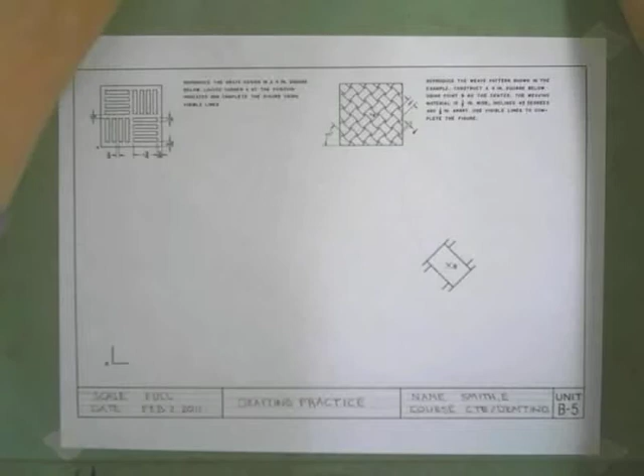Okay, going to start off with drafting plate B5. Going to do the first activity, which is B5a. That will be this first activity. Before you start it, please make sure that you have your title block all filled out. Just like the other drafting plates that we did, this drafting plate will just be called Drafting Practice. On your name, please make sure that you put your last name, comma, first initial.

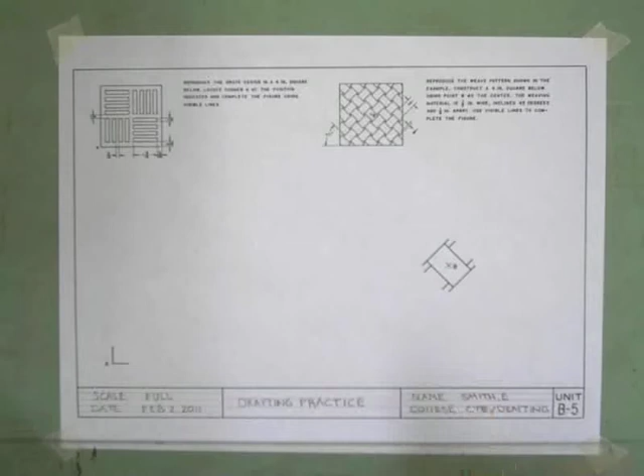Okay, the first thing that I'm going to do, this activity tells me at the top to reproduce this grate pattern in a 4-inch square. So the first thing that I need to do, with nice dark visible lines, using my T-square and my 60-30 triangle, I'm going to create one horizontal and one vertical line. Make sure everything stays square. I'm going to create those two lines. That's how I'm going to start it.

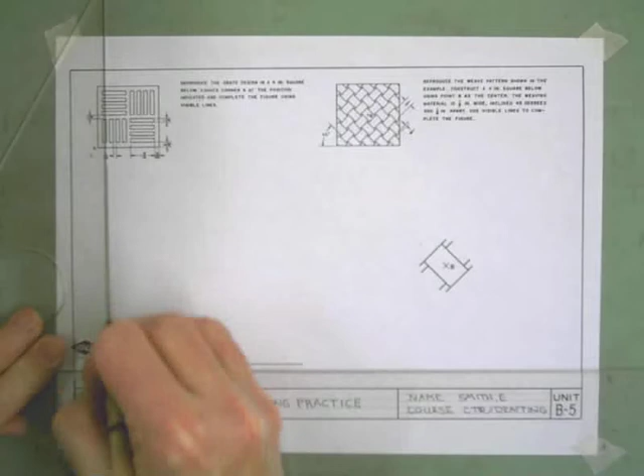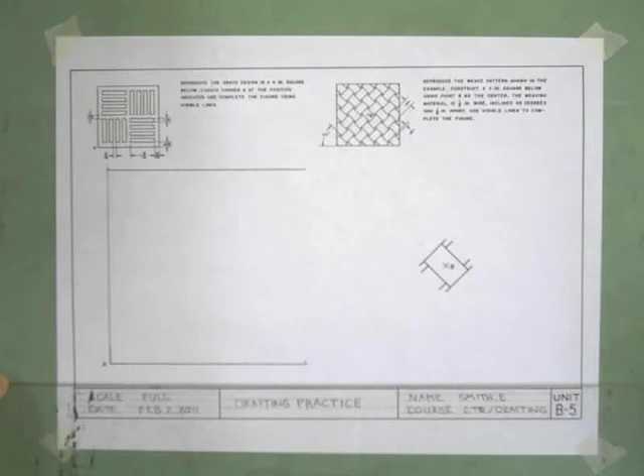Then I'm going to use my architectural scale. I hope I got this line long enough. Yep, I'm going to make a mark at 4 inches on the horizontal, and I'm going to make a mark 4 inches on the vertical. I'm going to go ahead and create that square, and it looks like I got this line just a little tiny bit short, so I can add to that. And I'm going to come in and do my vertical on the right hand side.

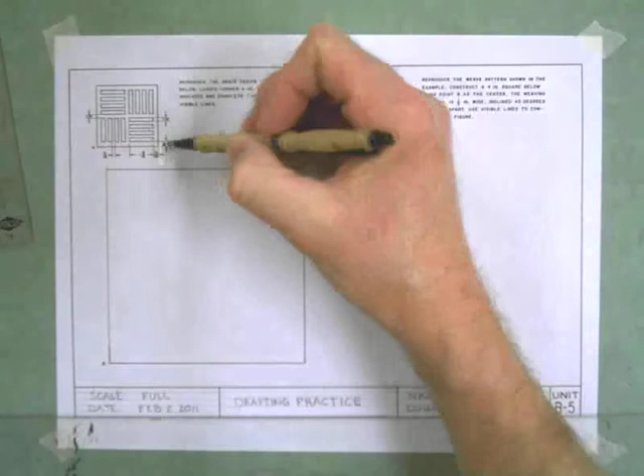I will use my eraser, and you could use your eraser shield here. Clean up those corners nicely. Brush. Clean things up there. Okay, step number 2 is I'm going to look at the measurements around. I see from right here that I need a 5/16 border around this.

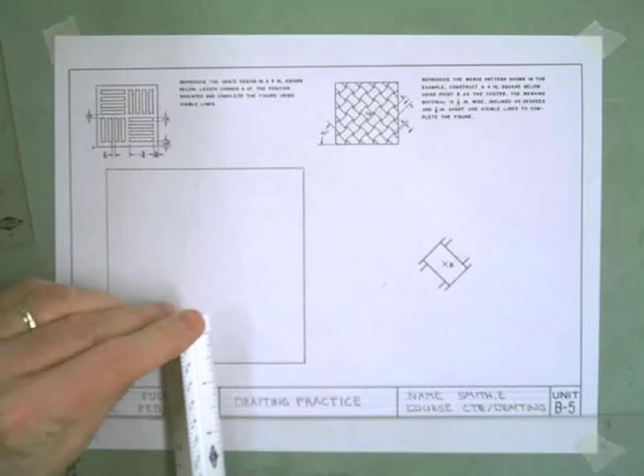So step number 2 is I'm going to use the basic side of my architectural scale, and I'm going to count in 1, 2, 3, 4, 5/16, carefully measuring all the way around on all 4 edges, 5/16. The bottom, so top, bottom, right, left, I'm going to make a little tiny mark at 5/16. Then I'm going to draw myself some nice light guidelines on my 5/16 marks. I'm going to do 2 verticals on my 5/16.

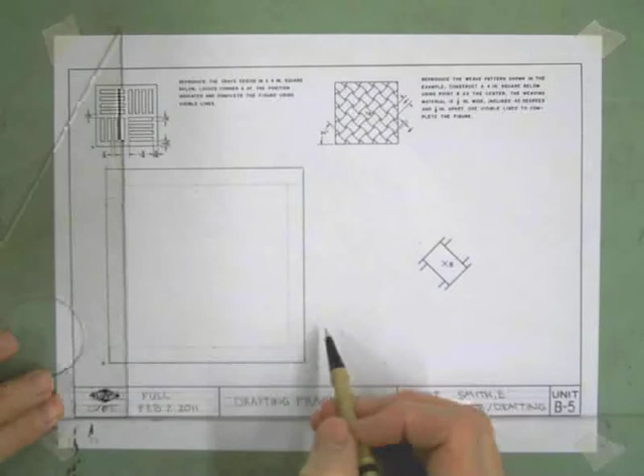And then all I need to do is I just need to come back in with my eraser shield and clean up those edges here, here. Be careful and don't erase too much of your border. If you're drawing light guidelines, it shouldn't take too much to get rid of those edges.

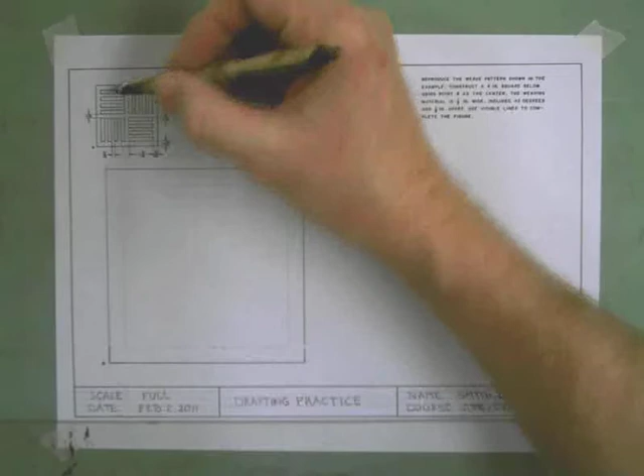Okay, step number 2, what I'm going to do, I know that I have to have a 1/4 inch area centered up vertically and horizontally. That's an easy one to take care of. I'm going to find the center of my square, which is 4 inches, and I'm going to divide that 1/4 of an inch in half, so that means I'm going to go 1/8 of an inch on either side. So I'm going to find the 2-inch point and then measure 1/8 of an inch on either side. I'm going to do the same thing on this vertical surface. I'm going to go 2 inches and then 1/8 of an inch on either side.

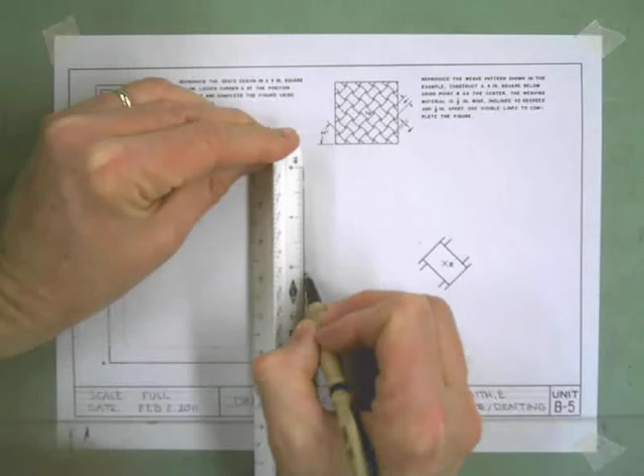Then all I'm going to do on the 1/8 inch marks, not on the 2-inch center, on the 1/8 inch marks, I'm going to draw some light guidelines. So that 1/8 inch here plus the 1/8 inch there gives me my 1/4 inch. I'm going to go there. I'm going to go here. Light guidelines there. And there. And all I need to do, use your eraser shield. I'm going to do this kind of quick to get me through the next part of the activity. You can pause this video as you need to get through the steps, but I'm going to erase these.

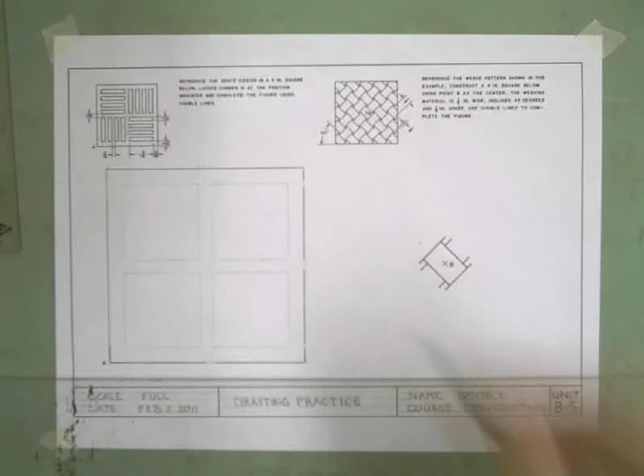So now what I have is I have my 1, 2, 3, 4, 1, 2, 3, 4 little individual squares that I can create my grate pattern. The next thing that I need to do, I just need to go through and do my layout. Each one of the openings in the grate is 1/4 of an inch. That's this measurement right here. Each one of the spaces in between the grate pattern is 3/16 of an inch. They give you that measurement here.

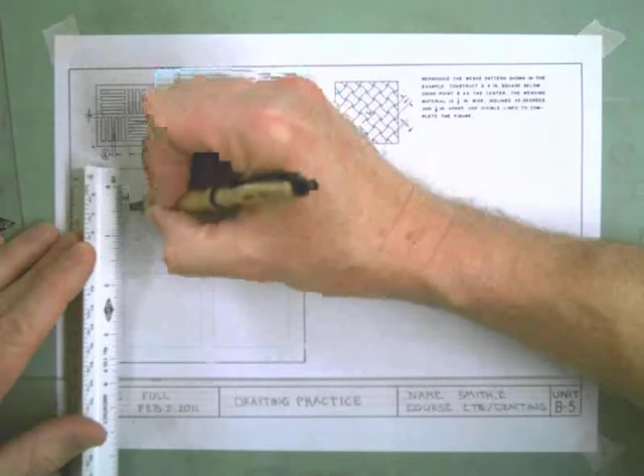So all I need to do is line up vertically first, and I'm going to count a 4th, then 1, 2, 3, slide it, count a 4th, 1, 2, 3, slide it, I'm going to count a 4th, 1, 2, 3, and then my very last measurement is 1/4 of an inch. And all I have to do, I just have to go in and darken all of those lines. I'm going to come down.

I've got my fourth, my 3/16, then I just have to use my 60-30 angle, and I'm going to come over and I'm going to cap the end of these just like is in the activity up here, so you can kind of see each one of those, how they kind of develop. And there's the first one.

Then all I'm going to do is erase. Happen to be a little off. It looks like my last one is a tiny bit off. Don't panic about that. Just go on to the next activity, and you're going to do the exact same thing again. You're going to go a fourth, then 3/16, 1, 2, 3, fourth, then a 1, 2, 3/16, then 1, 2, 3, 4, 1, 2, 3, then 1, 2, 3, 4.

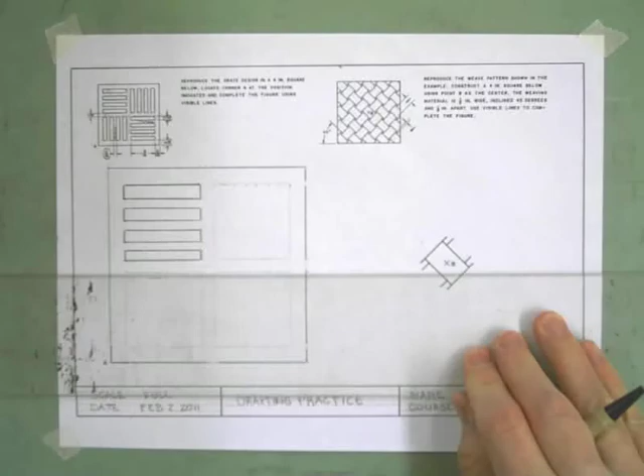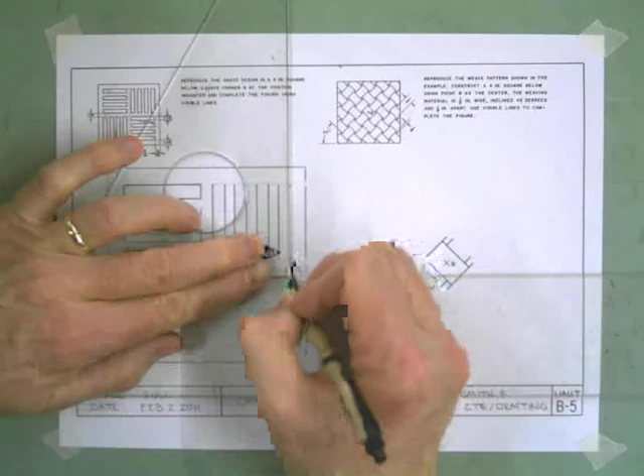So there. And I'm going to do the same thing, except this time I'm going to draw vertical lines here and here, then my 3/16, then my fourth, then my 3/16, and you can kind of follow them along as you go and see how that works out. And then I'm going to come to the outside of this, and I'm going to go my fourth, and then I'm going to do the same thing on this one that I did on the other one.

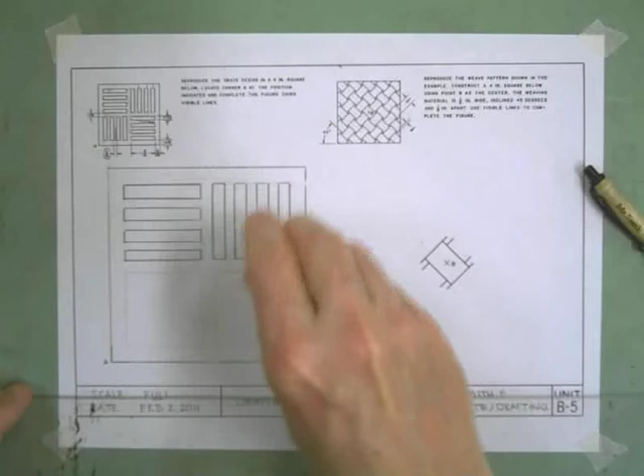I'm just going to come to the top, and I'm going to cap off every other one, and if you look, I'm capping off every other one on top and bottom, just like before. And if you drew those initial lines nice and light, you won't have to do this, but you can go through and clean up the little lines between. And there you have the first two sections.

I'll go ahead and do the same thing down on the bottom. You notice these are going vertical, so I'm going to do these layouts vertically here. And I'm going to go a fourth, 1, 2, 3/16, 1, 2, 3, 4/16, which is a fourth, 1, 2, 3, 1, 2, 3, 4, 1, 2, 3, and then 1, 2, 3, 4. And that's perfect. So then I can do my verticals here.

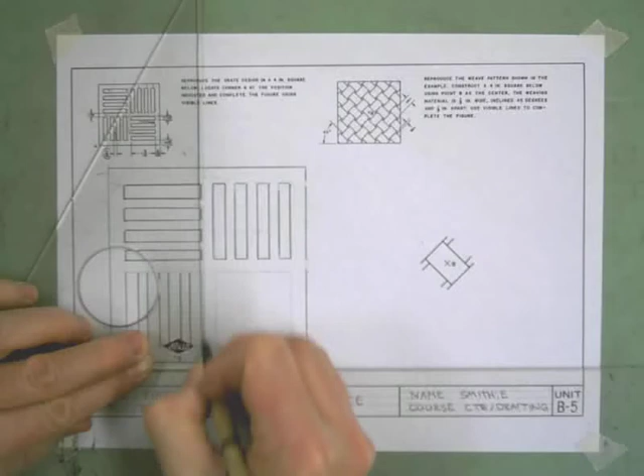Remember, I'm going kind of fast on this, but you should be pausing this video as needed so you can catch up on the little activities. I realize that when I do this in class, I go around and assist people. You can rewind this little video as needed so you can get these activities done kind of at your pace.

I'm going to cap them off again. Remember that I'm capping off the 1/4 inch, not the 3/16. Don't make that mistake. Cap those off. Going to come in, erase that a little, and clean it up. Then I'm almost finished. I can go with my measurements down this side again, just like before.

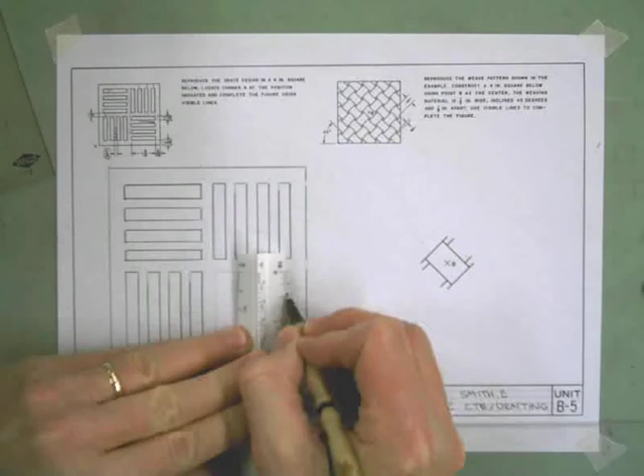I can go a fourth, 2, 3, 1, 2, 3, 4, 1, 2, 3. Oops, moved it a little bit. I'll reset again. Fourth and 3. 1, 2, 3, 1, 2, 3, 4. 1, 2, 3, 1, 2, 3, 4. That one turned out perfect again. So all I've got to do is go in and darken my lines.

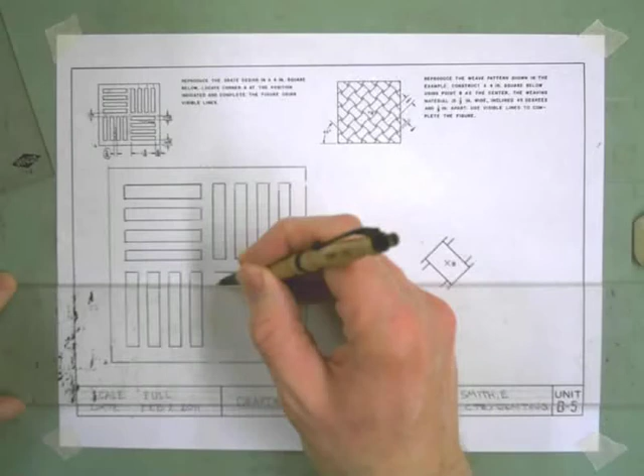There, there, 3/16, a fourth, 3/16, a fourth, 3/16, and my final one is a fourth. And then I just have to use my 60-30 angle along with my T-square to get those verticals. Make sure that you're using the drafting tools correctly, just like you've been taught.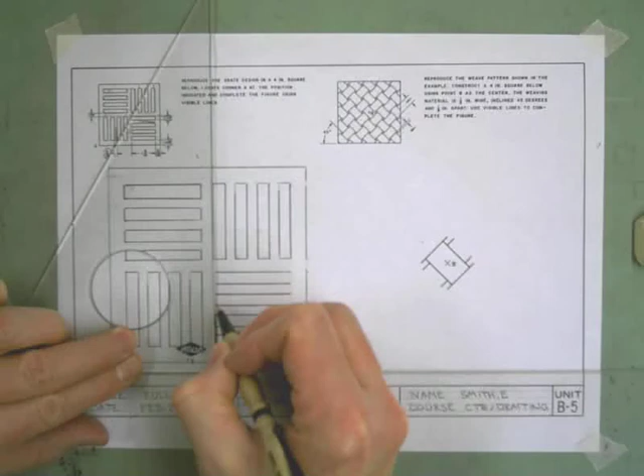Cap those off. I'm going to come down. I'm going to cap those off. I'm going to clean up the little lines in between. And then the very last thing that I'm going to do before I call this activity completely finished, I'm going to come around and I'm going to clean up all of my little marks because I want it to look as nice and neat as I possibly can.

And if I have accidentally erased any lines, I'm going to come in and I'm going to darken those up and try not to do any overlaps on any of my lines. Just where I clean things up, I want them to be nice, crisp and dark. I'm there. I'm coming to the bottom one. I am there. And there you have the activity.

You don't have to write this. I'm just writing it down for you. And this is B5 Part A. And then in the next video, I'll show you how to do B5 Part B, which is the little lattice pattern. And okay.